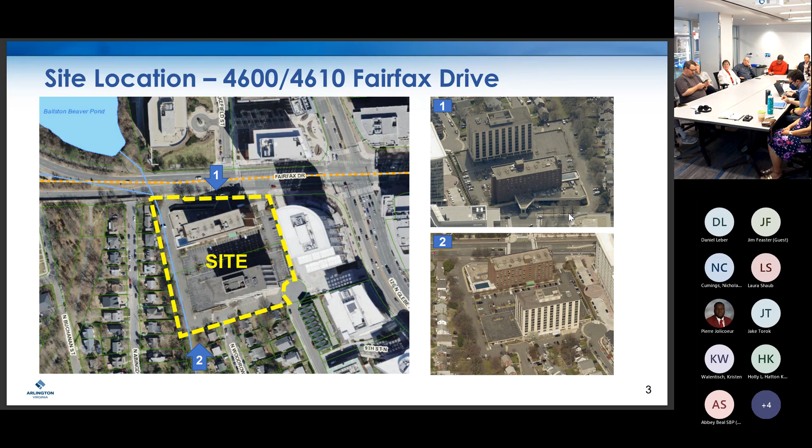I think everybody in the room knows where this site is, 4600 Fairfax Drive. We're about a block or two from the Ballston Metro Station, just on the other side of Glebe. Site access is from Fairfax and also from the south by Woodrow and Wakefield Streets.

The heart of this, which the applicant has more detailed slides to talk about, is that the single family detached homes on the two parcels furthest to the south of this site have been removed from the application, and so has the associated rezoning for those parcels. Therefore, building number 4, the triplex to the far south, has also been removed from the application.

The building face of this multifamily building has been extended about 14 feet to the south. The fire access road has been realigned, or more concisely, straightened. There are also some enhancements to the lay-by on the Fairfax Drive frontage, which the applicant has better slides to talk about. But the net change here is a reduction of 11 units, because we're adding 1 unit in the multifamily building and losing 12 with that building number 4 triplex.

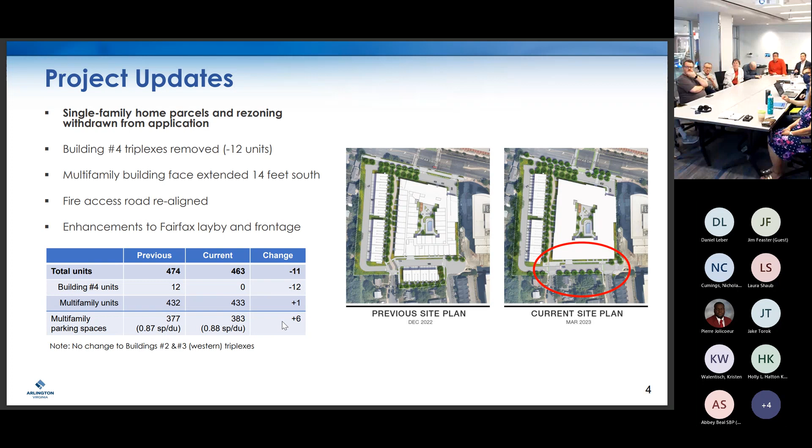In terms of parking spaces, there are 6 additional spaces added to the multifamily building, and no changes to the parking provided for those triplex buildings on the western frontage. For transportation, as mentioned on the previous slide, we have 383 spaces, or a 0.88 space per dwelling unit ratio for the multifamily building. Triplex buildings are parked at 1 space per dwelling unit; however, there's essentially tandem parking. We don't count that for zoning purposes, but effectively the parking ratio is 2 spaces per dwelling unit for the triplexes. As we discussed last time, loading is accessed on the south side of the site, and the garage entry point, the sole vehicular access point for this multifamily building, is off Fairfax Drive.

The big thing in terms of policy guidance, the limited policy guidance we have for this site, is that we're getting a multi-use trail connecting Woodrow up to Fairfax. That's consistent with our MTP bicycle element for adding a West Ballston Connection and a 12-foot clear path with landscaping on both sides for that pathway. Fairfax Drive is also very important for connecting the Blue Line Trail, and we're getting a 12-foot wide clear path there as well. The applicant has some cross sections to show, which we can discuss in more detail when it comes to transportation.

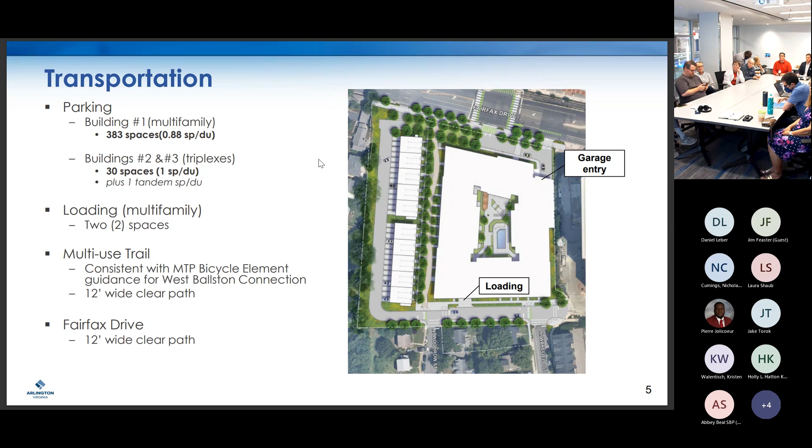Highlights of landscaping and stormwater management. We have pretty limited site-specific guidance here, but the applicant is achieving what's recommended in the Ballston sector plan in terms of having plantings and walls along the western and southern edges of this site to create more of a transition to the lower density neighborhoods. We're going to discuss some potential for adding additional street trees along Fairfax Drive and on the southern edge of the site. Overall, this proposal would be a reduction of 9% over existing conditions in terms of impervious surface area.

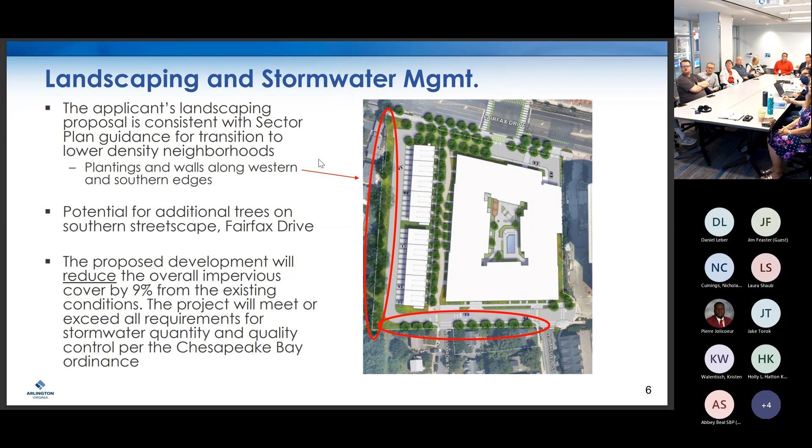In addition, the project is going to meet or exceed all of the requirements under the Chesapeake Bay ordinance. Okay, so community benefits. When I speak about this, I'm talking about things the developer is doing to earn additional density, above and beyond what a standard site plan application would do to fulfill the goals of a sector plan.

For example, the trail. The applicant is requesting 0.25 FAR additional density for fulfilling our green building incentive policy, that's LEED Gold. Just a couple highlights, since everything listed here is essentially a prerequisite for this level of density: 20% energy optimization, Energy Star post-occupancy certification with a minimum score of 75, Energy Star appliances and fixtures, WaterSense plumbing fixtures, and a number of other prerequisites including EV parking. For example, 4% of spaces would be EV, and 15% would be EV ready. Bird-friendly materials too, since I think that was raised at the last meeting as well.

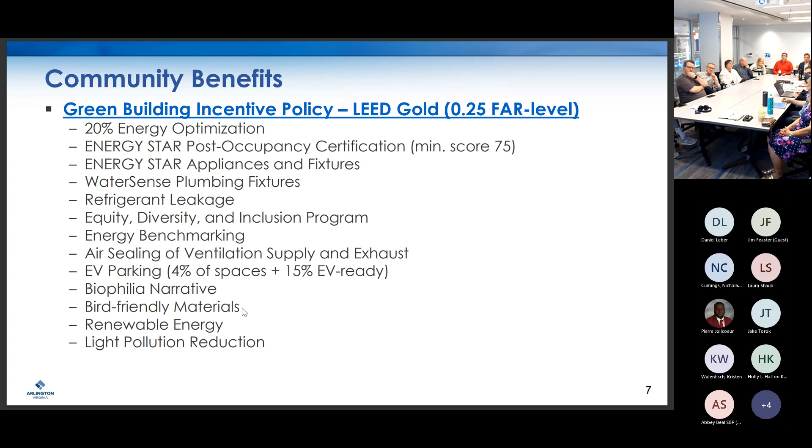Stephen, that is the end of my presentation, and I'm happy to yield back any time if there are questions.

Thanks so much. Once again, Kathy Puskar with Walsh Colucci, and I'm going to try and run through this quickly as the chair has asked me to do. So if I miss something, I'm sure you'll ask me a question. I'd be happy to answer.

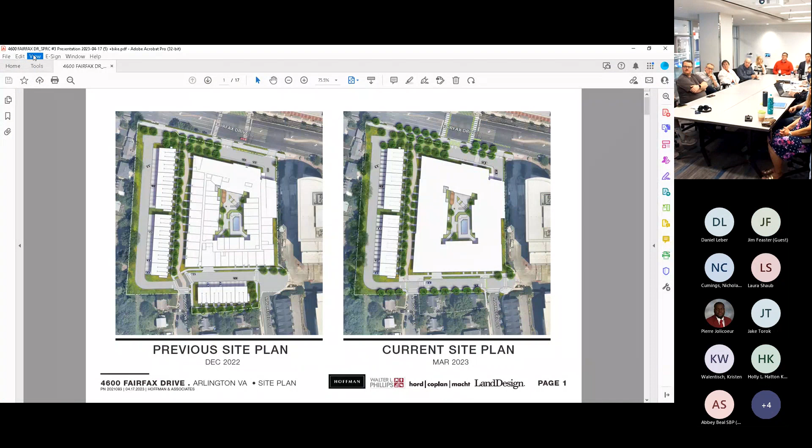Quickly going through this, you'll see the previous site plan on the left and the current on the right. The big story this month is that we removed the triplex units on the south, a reduction of 12 triplex units. That allowed us to do a number of things, including straightening out that road. There were a lot of conversations about the southern portion of the property and how the road kinked, and what that did to the intersections and pedestrian access. So we removed those triplexes, which extended the multifamily building hardly perceptibly, 14 feet to the south, and then straightened out that road.

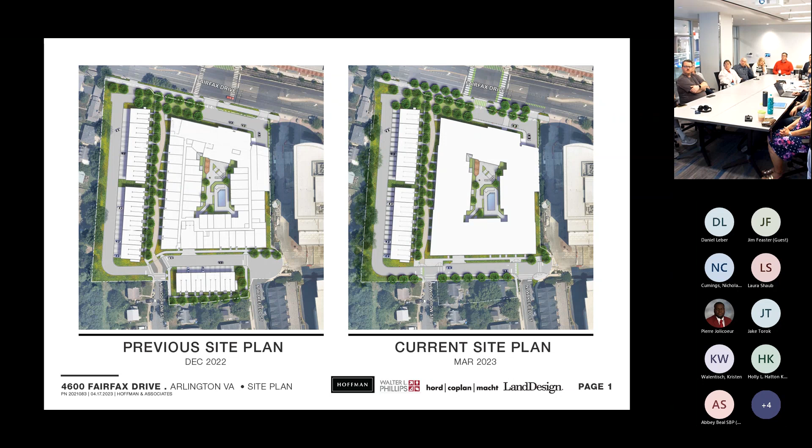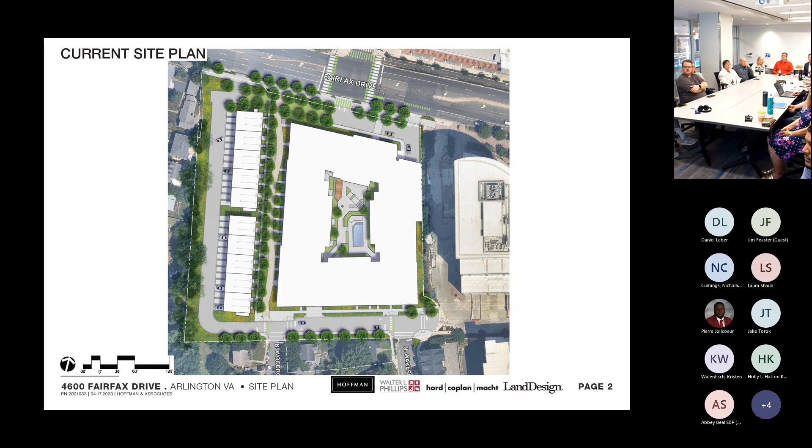Blowing up this area to show some improvements in a little more detail based on what we talked about at the last SPRC: we've included sidewalks on both sides of that street now, added sharrows to the drive aisle, and shown locations for signage and stop signs at those intersections, as well as identification of pedestrian and bicycle crossings.

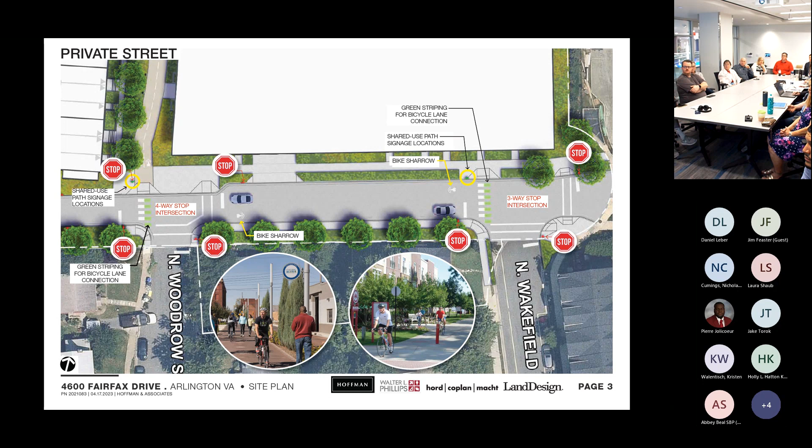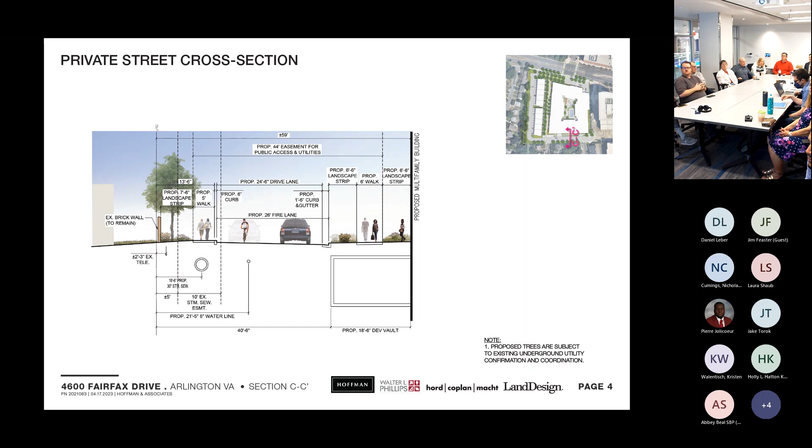I did want to point out, and you'll see these in the cross sections as we walk around the site, there are existing easements that will remain in various locations on the property. Our goal is to try and put the trees where they're supposed to be. However, if we get out on the site and find that conditions are other than what we now believe to be the case—we feel fairly confident this is the case, but there are some existing easements that cause constraints.

And then just moving farther east, you'll see striping for the bicycle lane connections. And then we're going to move east on Fairfax Drive to look at the lay-by area.

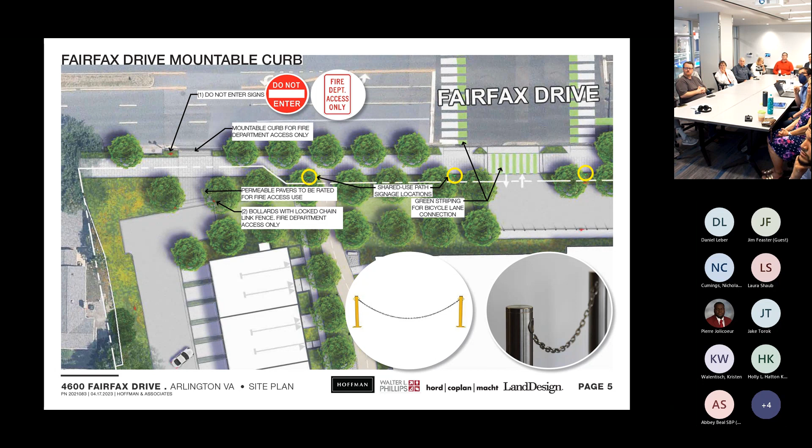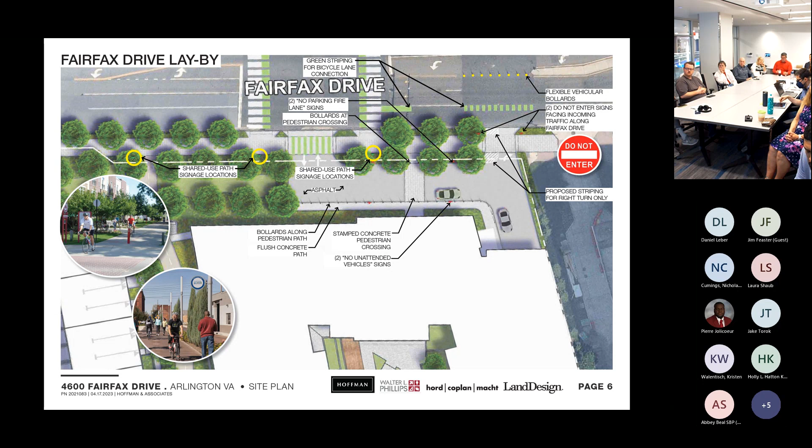In terms of prioritizing pedestrians and helping them understand how to quickly and safely get to Fairfax Drive as they head east to the metro station, you'll see we have stamped concrete pedestrian crossings there, as well as bollards adjacent to the sidewalk, lining the sidewalk adjacent to the building.

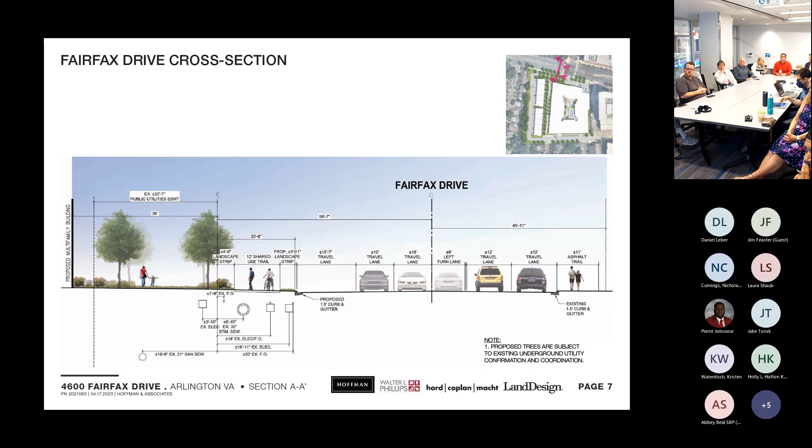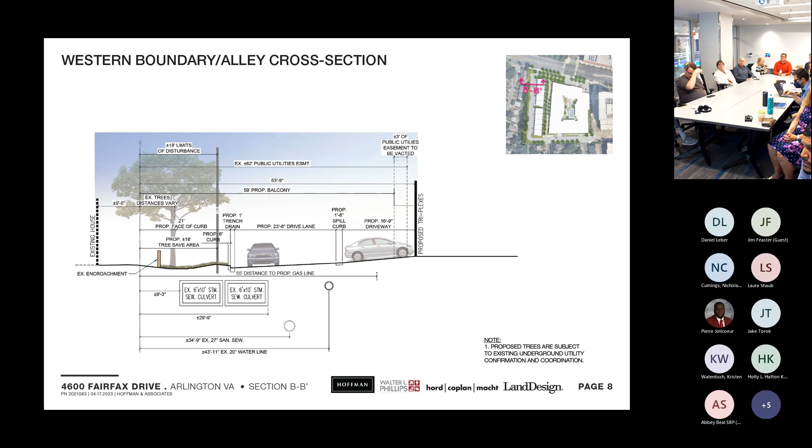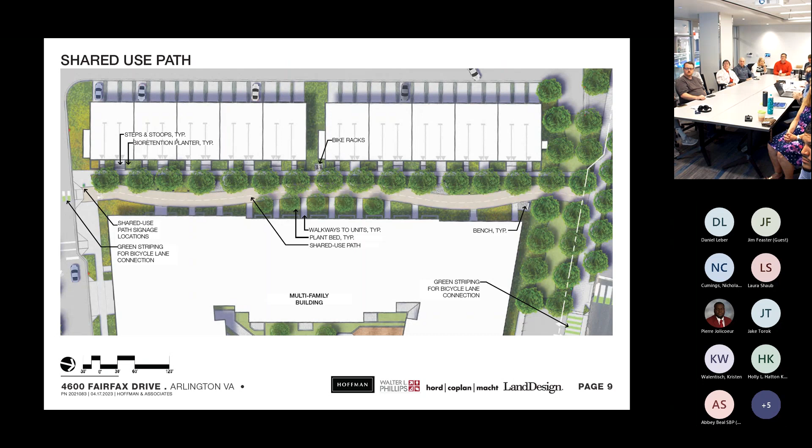This just shows you once again, we want to look at the cross section. This shows the ample space between the triplexes and the multifamily building, the shared use path, the walk that runs adjacent to the triplexes, and then adjacent to the multifamily building—once again you have those lead walks and landscaping.

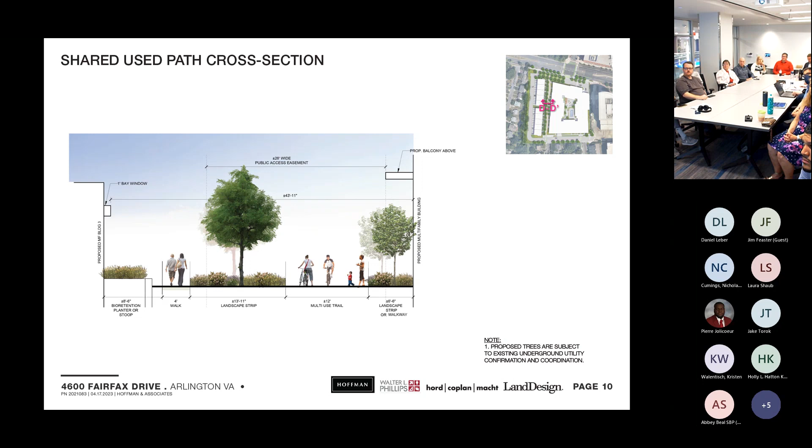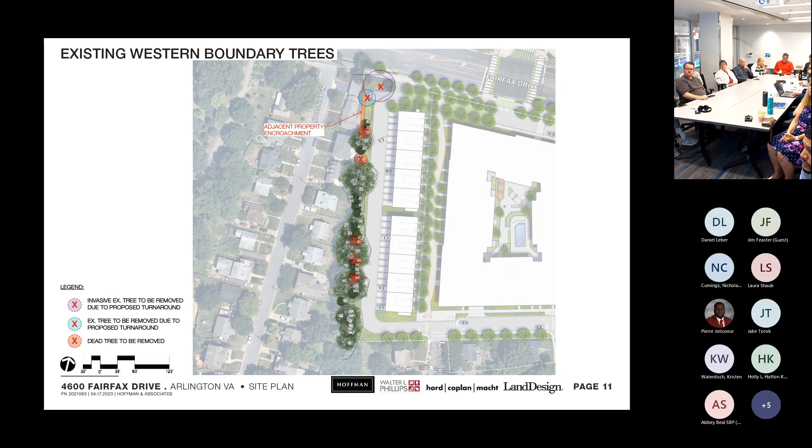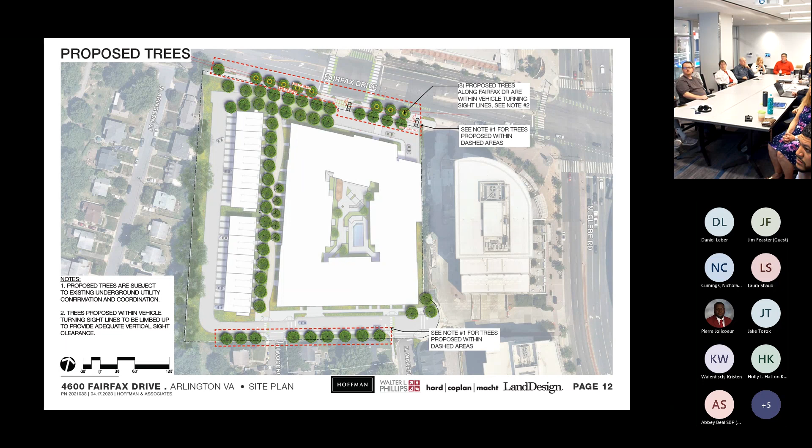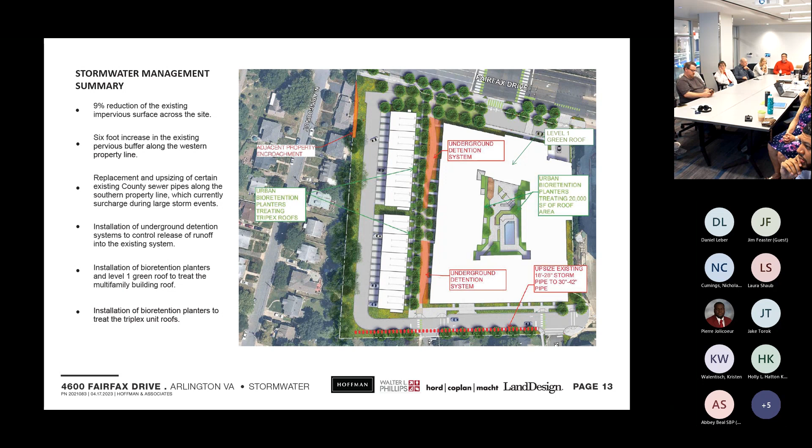In terms of stormwater management, there have been a lot of questions from the beginning of the process, so we've really honed in on what we're going to be doing. There's a 9% reduction of existing impervious surface across the entire site, and a 6-foot increase in the existing pervious buffer along the western property line we just discussed. We'll be replacing and upsizing certain existing county sewer pipes along the southern property line, which currently surcharge during large storm events, to help prevent that surcharge. We'll be installing underground detention systems to control release of runoff into the existing system, bioretention planters and a level 1 green roof to treat the multifamily building roof, and bioretention planters to treat the triplex units.

In terms of community benefits, we will not have any on-site units here because we are using the Green Building Incentive Program as our bonus provision, but our base affordable housing contribution will be approximately $2 million. Our utility fund contribution is going to be approximately $230,000. We'll have the standard public art contribution, the 12-foot shared use path along Fairfax Drive and running north-south through the property, and also the 0.25 green building bonus.

Moving on to sustainability measures, we do meet the county requirements. As Adam stated, we used the county's checklist for this, and we meet the county requirements for all of the required measures to get that 0.25 bonus.

The estimated start of construction, if all goes well, will be in the 4th quarter of 2024 or the 1st quarter of 2025, with estimated initial occupancy in the 2nd quarter of 2027 to 3rd quarter of 2027.

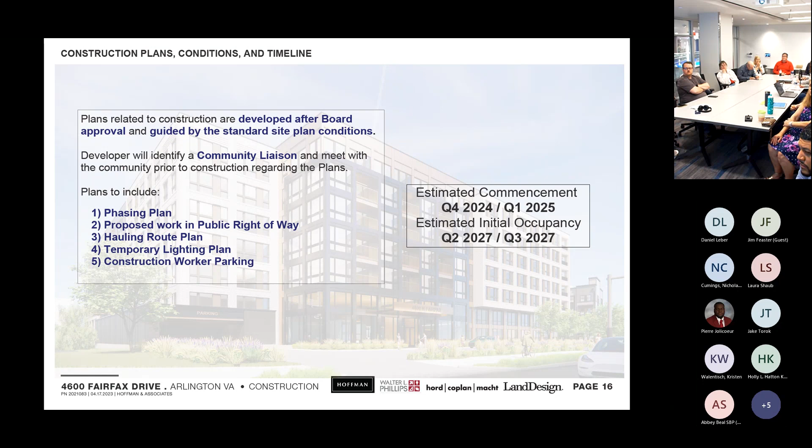It's pretty difficult to give detailed construction plans at this level of design. We will bring a contractor on board, have a pre-construction meeting, and have a community liaison available to meet with the community prior to construction and answer questions throughout construction. We will need to work with the county to create a phasing plan, identify our hauling route, discuss any proposed work in the public right-of-way, a temporary lighting plan, and construction worker parking. There are standard conditions related to many of these items and standard policy expectations about how we operate once we come onto the site. That's not to say we don't understand the community has a lot of questions since they live in the neighborhood. There will be some disruption, but we'll do our best to limit that, and we'll have a meeting to tell you what to expect and when.

Well done on the time. We'll call it close enough.

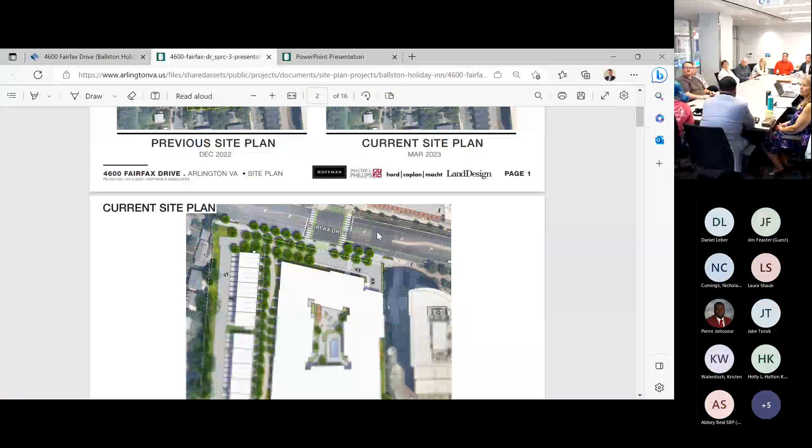About the crosswalk - the best I know is, on the right side lay-by, cars coming out cross the trail in two different spots. One has very clear green striping, and... oh, I see what you're saying. Oh, we may have just missed that. We could add that to this one.

One thing I was going to say is that the intersections are a little different - it's signalized there, so it's like a striped crosswalk with heads at the main intersection. So for that crossing, I think we've been working with DES staff, and the intent would be the biker would possibly get onto Fairfax Drive at that point and get on the bike lane in the street. We already added the green striping in the bike lane to draw attention to it, but it's something we can still work on. That's kind of the background of how it is.

Nobody does that, no one uses that. Yeah, it's a death wish. It's a true death wish if you want to. People keep this going on. I don't.

Yeah, I think so - if you want us to, we can work with staff on where there was... I don't think we want to. And also, is the drive, the lay-by area, here in front, grade-wise compared to the sidewalk/trail - are they even, or is it flush? And then we have bollards for that walkway.

I think that's what I have for now, but I don't promise not to come back. David, then Jim. Okay, David first, then Jim.

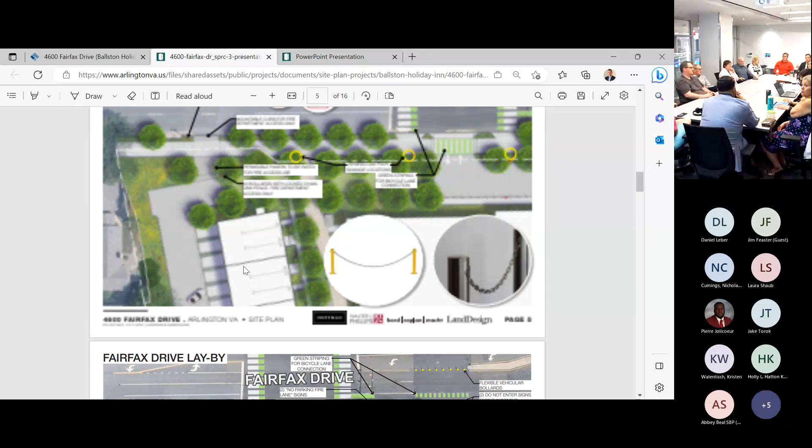So if I follow you, the main building will not load or unload onto either Wakefield or Woodrow? It will have loading. We have a multifamily building that will have trash pickup and delivery and loading and unloading when someone moves into their unit. But there is no vehicular access for the multifamily building from Wakefield or Woodrow. All of the access for the multifamily building occurs off of Fairfax Drive. Okay, thank you for that.

Adam, is there any plan to adjust the parking spaces currently available on Woodrow and Wakefield? Are those still going to be subject to neighborhood zone parking? Thanks for the question, I'm going to defer to Jane Kemmis here from DES Transportation. If it's currently zone parking, there's no plans to change what's currently out there. I would suggest if it were not zone parking, then you could always apply for that. But no, there are no planned changes to the existing on-street parking conditions.

And the streets will both remain two-way traffic streets? Yeah, the streets themselves will not change from what's out there today.

So the multifamily building is intended to only have access to Fairfax. Correct, correct. It is impossible for them to get access to the parking garage from the neighborhood to the south.

And is there a concern about the additional traffic onto Fairfax, especially peak hours? It can get fairly hairy coming from 66. No, I mean, it's a signalized intersection. Will we expect, on a rare occasion, cars to potentially be backed up in the queue? Probably, I don't think that's an impossible occurrence, but it's all within the private property and not blocking the street itself. So we, as DES, don't have as big of a concern as if it were to block the public street.

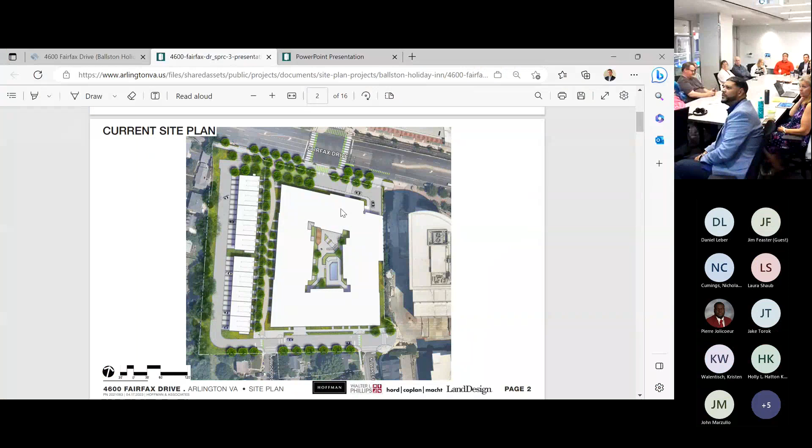Yeah, applicant. I think it's the one with the right turn that we keep talking about. Sorry, I'll get rid of this.

So here, I wonder about the visibility in this area. A lot of the traffic is going to come out here for cars turning right, as well as traffic exiting, or pedestrians or people on bikes. Is there a visibility issue with how that's set up on that sharp right turn, with someone coming off 66 and trying to make a sharp right turn there at a high rate of speed? I just kind of see people making a right turn and maybe someone trying to cross or ride a bike. That's some questions on that.

So that area is a signalized intersection. And as I mentioned before, we are adding some trees because there's been a lot of interest among the public and staff in adding street trees where we can. We mentioned that we do have some utilities out there that may limit that, but in terms of sight distance, we can limb those trees up so that you'll be able to see. And also, you're at a signalized intersection, so it's going to be a little easier to see.

Gotcha. And then my second question on transportation, I think you said the parking ratio was 0.88. Is that zoning specified, or I just wonder why we went so high considering it's so close to Metro? So 0.88 is a reduction from what zoning requires, and that's just for the multi-family.

Do we think 0.88 is due to the proximity to the Metro, or is almost everyone going to have a car in that building? I've never had a client who builds more parking than they think they need unless they're forced to. So if you look at the market and current conditions, 0.88 is the sweet spot they think they need.

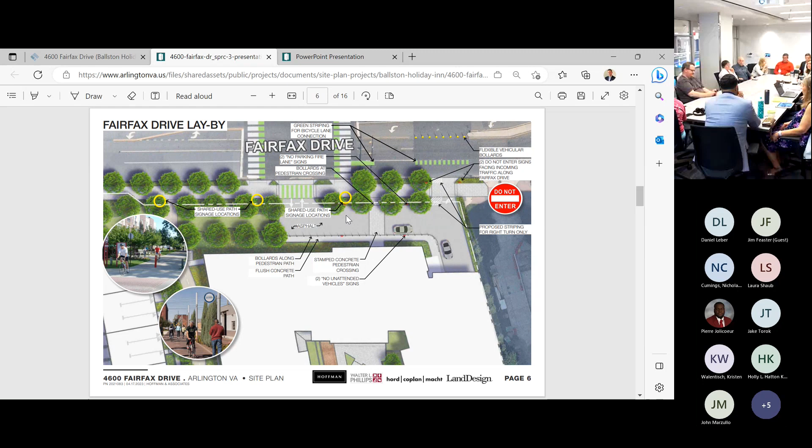All right, we've got two more items, but given that a generous amount of community benefits is created by these things, I'm going to combine them: questions, comments on priority, landscaping, stormwater management, community benefits, and construction. We don't need to go around the room, so try to summarize your thoughts. Questions, comments, Jim? Stormwater, right? Go through all four of them, try to knock them all out.

Stormwater, the question is for DES. The two big pipes running underneath the western part of the site, which I presume is Lubber Run - are those sufficient? Because we're having problems with the Spout Run pipes being too narrow. Given everything going on, are those pipes adequate given the changes in the amount of water?

Yeah, to my knowledge they are. We've been talking closely with the stormwater team that deals with that - we have four stormwater teams in the county. We've had many meetings with the applicant's engineer, and they've had to run flood analysis and those types of numbers to make sure there was sufficient capacity in the existing pipes, as well as no detrimental impacts on their site and up and downstream.

And there's overland relief above it, there's always an overland relief path, right? Because there is - when we look at overland relief, we say if all the drains clog, where does the water go? So there's the slope down to the western side. Stop right here, Jim. Yep, so the overland relief there.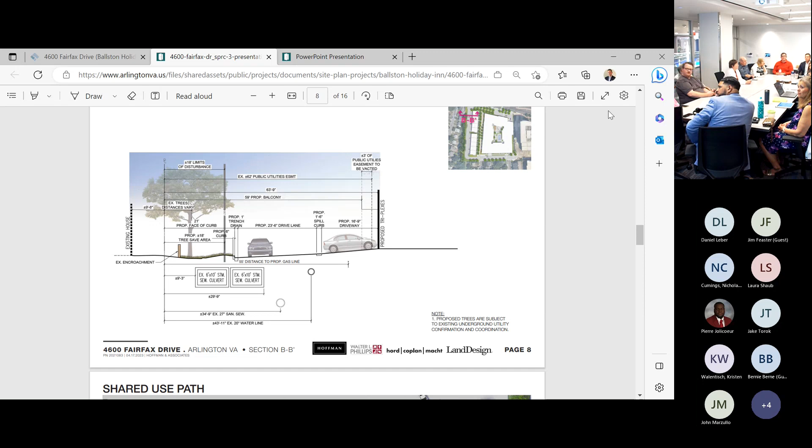And then with the existing and the proposed development, is it all within the property? And it is - that's the study we've been doing with the other groups at DES. We've looked at that analysis before, and it covers sections like what we're looking at.

And I'm sorry, are you part of DES? No, she's the civil engineer. Oh, I see. So my colleagues in the stormwater group at DES have evaluated their analysis to make sure they agree with their conclusions, and they don't have any issues. So in a sense they're concluding this is providing the overland relief. Right, correct. Because we know there's a lot of homes being purchased now. Yes.

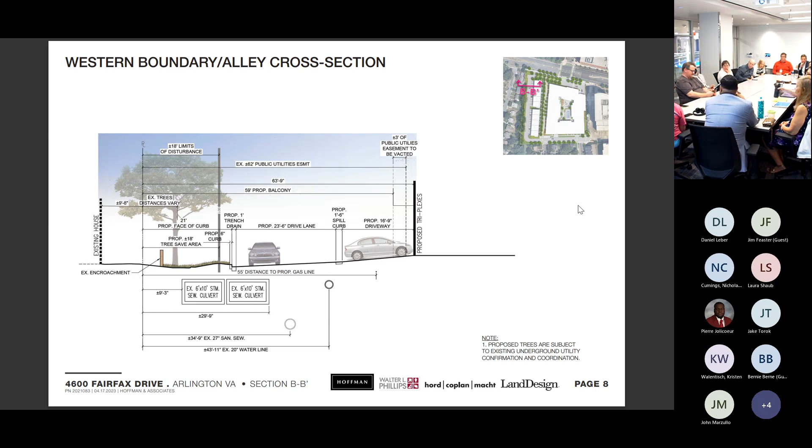Switching topics to affordable housing - it's going to be just the contribution, there are no on-site units. That's correct, but because we have so much base density on the site given its size, it's a sizable contribution, about $2 million. No, it's big, I think that's a nice chunk of money. I'm not complaining about that at all.

But given how close this is to the subway, because we don't know where that money is going to be spent - really, I'll tell you now, you're going to run into questions at other commissions about why there aren't any on-site units. There really should be, even with this contribution, some on-site units.

So as a reminder, the base contribution is a way of saying - Virginia code allows the applicant, up to the time of permit submission, to choose its particularities: one of which is a cash contribution, the second of which is on-site units, and the third of which is nearby affordable units.

Every applicant has preserved the right under state code to make that choice at any time they so choose. They will generally not say so, although almost every single applicant chooses the cheapest option because our state legislators approve of it, which is cash. I just want to make sure the fact statement is out there so everyone knows all the facts around that.

Had it been on-site units before, or am I thinking of a different site? On-site units are generally available to the county as a negotiating tool in the event in which the applicant is not entitled to state code as their sole method of development.

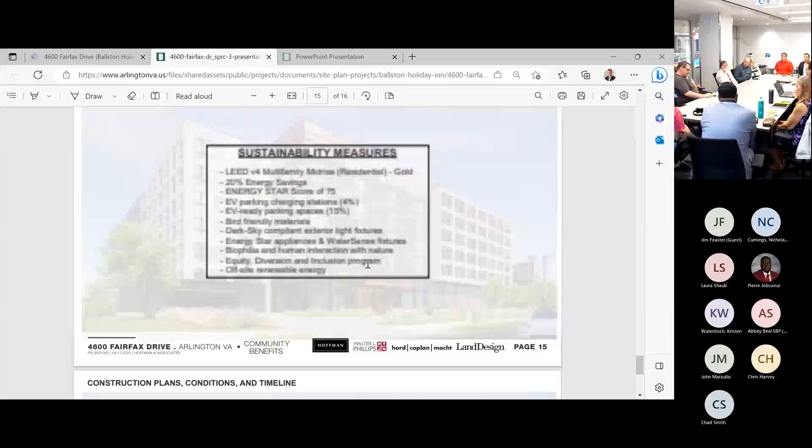Couple questions on landscaping. Roughly 23 trees you had marked with a dotted line saying you don't know whether or not, because of the underground utilities, if they can't be planted in those locations, are they going to be planted elsewhere on the site, or just no trees at all and some alternate landscaping treatment?

Yeah, our intention is to plant them. So let me be clear about that. We have looked at it. We think, we hope we can plant it. But if we can't plant those trees, Gabby, what? Yeah, the intent is to find another place within the site as best as we can. But as you all know, each tree also has a minimum soil volume requirement, so we're not going to get away without providing that. There's only so much soil that we can provide. So as you can see, we've maximized, and personally, that sense of arrival to the gateway property that you mentioned is going to be incredibly enhanced by all of these extra trees.

But to the extent that we can't do a tree there, to the extent that we can, yes, we will, before we start mixing trees, try to find the best location. Absolutely. But also, there's not a lot of room, like you said. So if a tree has to go, let's say a couple of trees, let's just pick the three on the east. Yes, step one.

Would you then do shrub plantings there? What would go in place of that? I mean, the trees are in a landscape bed, so whether there's a grass strip as a DOT standard, or an interior plant bed, they will have a landscaping bed, number one. But if we stay with trees, they will be relocated if we can provide the soil volume. If not, there will be some other green.

And following up on trees and the Bluemont Junction Trail and the new trail, be sure to select species that don't have a lot of root heave. That's the thing that kills our trails in the county more than the actual usage of the trails. It's the roots of the trees pushing up, causing falling hazards. So I see what you mean. Thank you, and yes, we hear that.

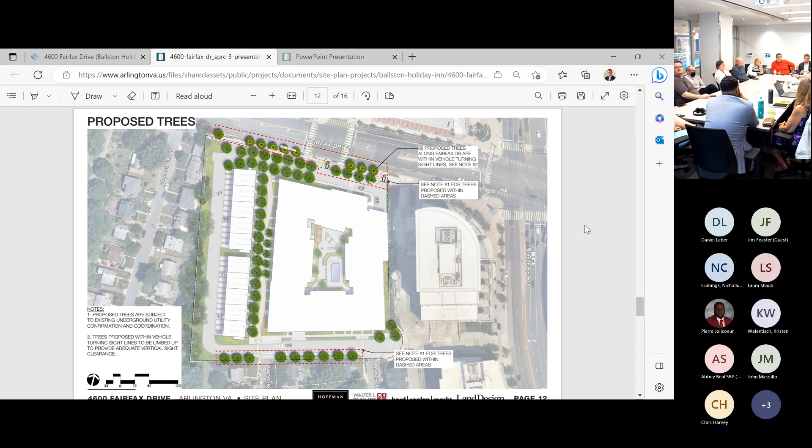I've got several questions. On page 11 of the presentation from the developer, there was a note about adjacent property encroachment, which is what I was talking about with the fences and the shed. There's a shed on that person's property, and our property line, their improvements go over the line into our property. So there's a shed and a fence there. As I mentioned during the presentation, we've designed our project around it. We do not currently intend to make you move anything, but we're also not going to just give up that land. Right now, everything will just be as it is.

So there's no plantings or retaining wall planned? I didn't see anything like that. There is a vehicular turnaround, so those two trees are going to have to go away and there will be some pavement. But as far as I know, we've designed our improvements to avoid that fence and shed. The curb is going to be further from where it is today, about 6 feet farther east.

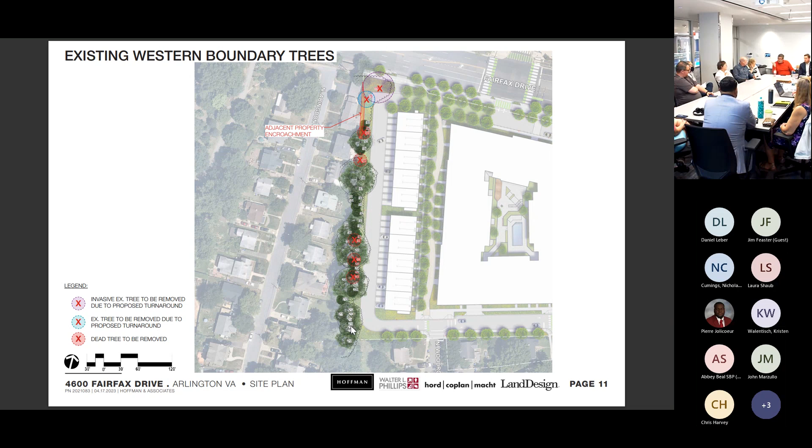We've got one last question. It's on stormwater, it looks like some good stuff. What I'm wondering is, are you just meeting the state laws, or are you exceeding the state laws? Meeting. Okay, so that retention looks great, but it's really just kind of meeting the basics.

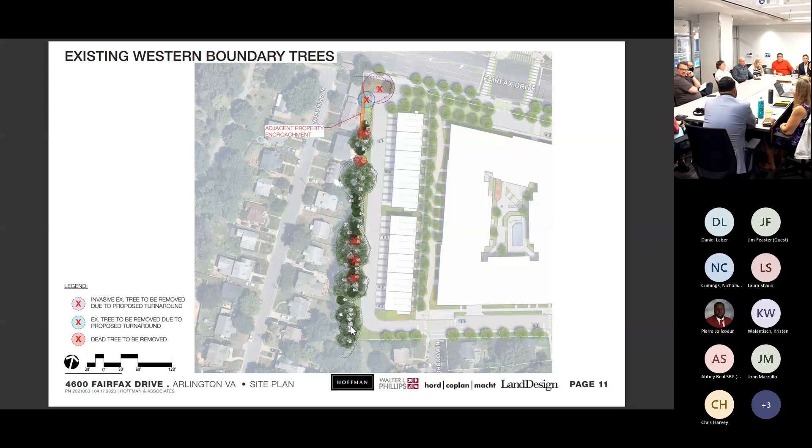Jim, we have Jim online, and we also have John. Jim, anything? We still have wrap up comments, so just right now. Anything, Jim? Yes, I think this will be a nice addition to the neighborhood.

I especially appreciate the improvement of the shared trail connecting to the Bluemont Junction Trail. As a frequent user of that trail, both biking and running and walking, I will appreciate any improvement, it's better than what now exists. And I appreciate the access from the west side of the property back to Wilson Boulevard. I think that will be used also.

I would also add that, if I'm not mistaken, the management of transportation document is a public document and will answer some of the questions that have to do with the maintenance, the management of transportation on the project. So that's accessible to all of us.

Thank you. John, do you have anything you want to add on this particular subject before we get on to public comment? Nothing further from me, Adam.